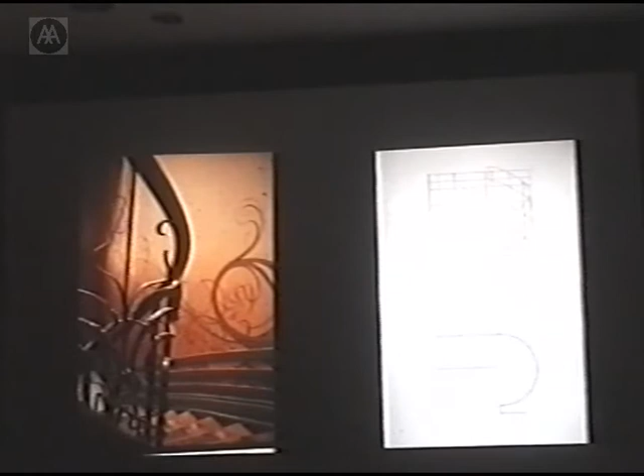The next stair is a little staircase very, very early on in the history of the practice for Tom Phillips and his studio. We did studios for Tom and for Antony Gormley around a shared courtyard. And it coincided with a period of research on the work of Victor Horta for the Masters of Building series.

And I retain an incredible respect for this symbolist and intense world of the interior, and its manipulation of material to an end that is kind of disappeared in some ways. But again, the sense of the use of metal and crafting and the finishes and the stasis of the moment that's captured in the paint.

The light, an amazing grasp of all these - and this is the Hotel Tassel. So this is sort of the first moment of its genesis.

In a way, for Tom, who is an artist working in a completely different way to Antony Gormley, who wanted an expansive space, the passage from an entrance space around this column inhabited by elements powerful or important to him emerges into an interiorized space, because we'd lost the windows to Antony Gormley. Then there's a further climb to this little space, like a portrait painting studio at the top, culled out of very simple materials.

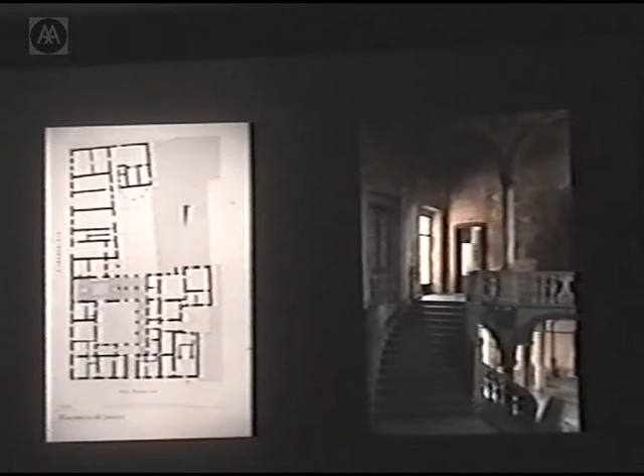It's a town that doesn't give a lot of this away, but there are 100 fantastic small palazzi with passages and stairs running up to saloni—some quite crude and vernacular, some incredibly sophisticated. That was the idea for the mediation of common space in this scheme in Kuala Lumpur.

The idea is that as you rise—this is one of those stairs—off it there's a clubroom which is not enclosed hermetically, it's open to the wind, so there would be a room off it, then a landing. There's a sort of sense of ease in the way a family will use those spaces, totally differently to here, obviously.

It's almost about creating openness, weathering, but allowing the wind to move through—a very environmental thing. It's also about the way these vertical elements create a sense of the semi-public in this community space, shared around the calm of a small garden at the centre.

Stockley Park, on the other hand, is a building, a pavilion, a kind of glass pavilion to be subdivided and let as a sort of seed building—a completely neutral plan, a totally different discipline, dealing only with the public dimension: the entry, the atrium, and the ways into these spaces. But an extraordinary instant landscape. The idea was to create something that was not just about circulation in the interior.

There's more to that, but a very primitive, simple system that required quite a lot of innovation in terms of the carriers and the way it was put together, drawing these trades together, which created a very strong horizontality to the way the landscape is perceived from within the building, but at the same time created a translucent wall that was very high in order to let a maximum of light back into the plan.

At Pembroke, there was the question of taking the brief, which was for 100 rooms or thereabouts, and trying to work between the historic kind of condition of courts and a way in which one might seek to order a wall with so many openings in it.

That comes back to the question of the room, which is very minimal. For instance, the door has a big architrave on the outside but a minimal bead on the inside, in order that the bed can be there or there, that one can change the furniture around.

This is a room like an undergraduate room, where an incredibly important aspect was not having a kind of hotel ensuite conference operation going on—just a small basin and wardrobe, meaning people were sharing the passages. At the same time, to wake up in a room of these tight, standard dimensions, as one does at the Moller Centre at Churchill, to a single window felt inhumane.

So the question of how you put 200 openings into a wall and maintain order was a critical issue. The idea of the back-to-back servicing of these rooms, and therefore a wider order and a tighter order, was something that began to figure on the facade.

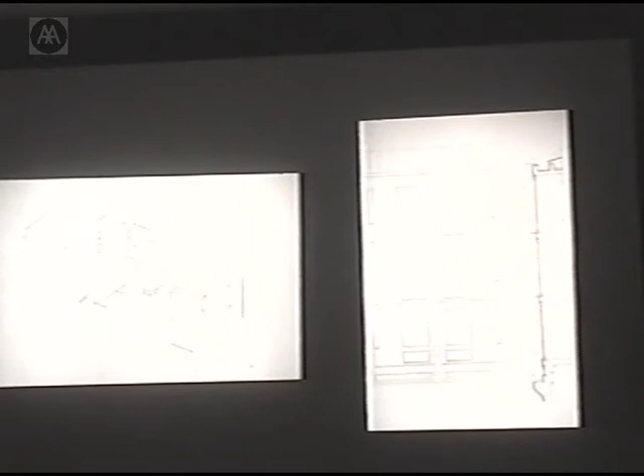Then the condition of a drained area of fenestration within these bays. This is working with a wall of about 550 millimeters, so there's a gutter that collects the water which would otherwise stain the lintel below very badly. It's collected and drawn down the facade and over the bottom sill, relating that to stone and stone size.

This created the tension that culminates with the rhythm of the thicker and the thinner pier of stone. It's a skin of stone, a self-supporting skin. But you have the two windows and the bottom element that gives the maximum of light into the space, so one's able to live in these spaces without artificial light for a good deal of the year.

There are other larger spaces that mediate the monotony of the undergraduate room, culminating in a lodge at one end and a series of garden spaces on the other.

Returning to Damai Suria, which was happening at about the same time as Pembroke, very interestingly in comparative terms—here in Kuala Lumpur, as I say, it's this incredibly moody, savage weather that is torrential or very dry and very hot.

The whole discipline of the facade was about opening it to allow maximum air movement, so we evolved an idea of a large rhythm of frame, and within that a space that again retreats, like Pembroke in a sense. It's a series of layers with the handrail overlooking the communal space, and louvered panels that can be withdrawn and stacked to one side, or pulled and maintained open or shut, but always to create air movement which runs back through a living space to the common areas of the stair hall—so you get the sense of the draft running back.

And so the kind of constraints were clear of a plan which we took very literally. Did not want columns, so these are 15-meter spans with an atrium that you come through to, and bridges, so it can be subdivided and be flexible, etc.

The external line is the load-bearing muscular line of the building, which you can see on the section here, so that transforming the base away from a sort of cour anglaise or area, it becomes the piers. There's a setback there to allow light into the lower level, and then these beams are picked up by these precast encapsulated concrete steel sections.

We don't have time to go into any huge detail, but you can see then that the loading paths sort of set up diagonals, and there were two things that were ordering devices. One was the attempt to create a tripartite breaking of the facade, which is obviously almost twice as long as that in terms of the square, so that there is some rhythm, and that there is a movement down to the entrance at the center.

And these just show a series of preliminary studies. These are actually taken from sketches, but then developed into a more final form in this way, in the kind of black and white.

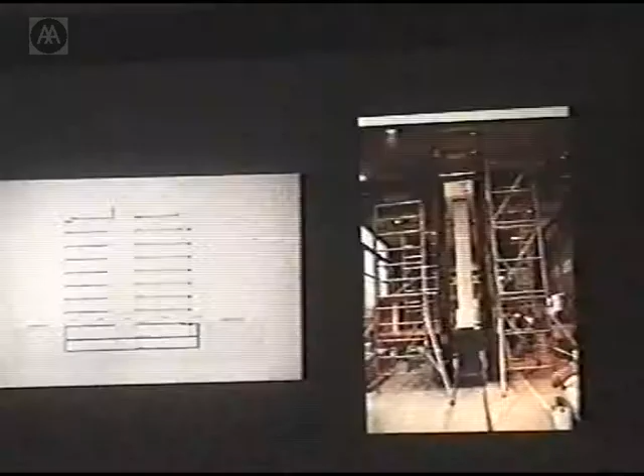But naively, there was a sense in which one might work double heights, but once the accumulative load at this point became impossible, so it became better for the constraint and the simplicity of that ordering, which was a communication with Whitby and Bird. It was a marvellous and interesting period.

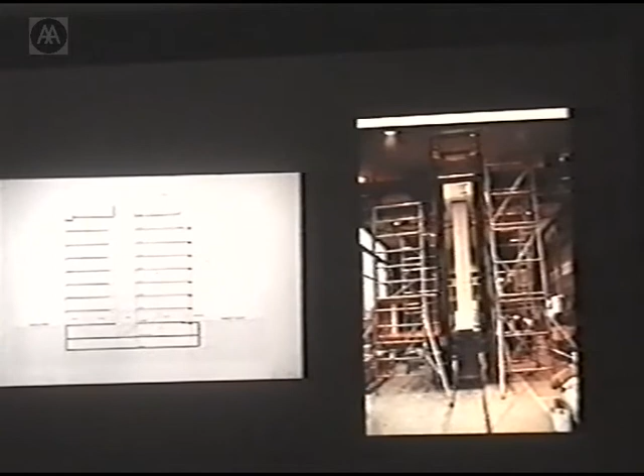And here, you know, this was using Portland stone. This is about the limit of Portland stone that's not used as a wall with openings, but rather a sense of these prefabricated piers. I'll just show you this.

This is because it was difficult to find a precedent for this, we had to build and test these piers. So this is a pier that took 250 tons of load, and actually began to crack the elements at the base rather than show any form.

I mean, it's a fantastic material that's used insanely with the amount of kind of stainless steel and stuff that goes together with the bathroom tiling of standard office facade. So this is the resulting facade, which is now actually built, so it can be seen. It's still wrapped.

But it's that removal, that space—it's a shadow, like a time clock too, because as the sun moves around it's doing an environmental job. The stone acts as a kind of brise soleil and has a capacity of coolth.

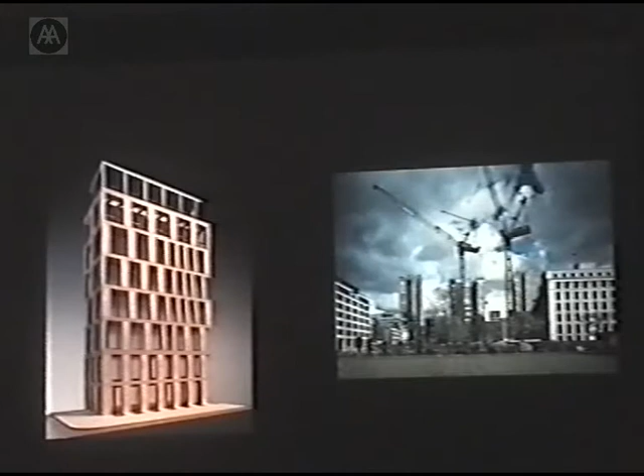Then, very briefly, to talk about the sense of context—because when charged with this, it was a very difficult planning problem, as there was a locally listed building, and the conservation officer had said it would come down over his dead body. He's still alive, but...

It was a question in my mind about the building and the square first, and that actually the building had to work with landscape.

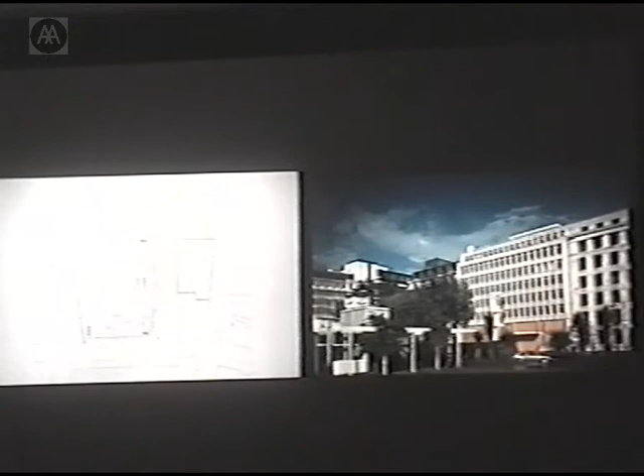So we persuaded the client to take on Peter and Anneliese Latz to look at the square, and I thought it was a very beautiful scheme they came up with—to remove the old bomb shelter that had an ack position on top during the war, and create a sunken public space with an acoustic wall to this very busy street, a glass wall, ramps, and two groves—one a sunny grove, one a watery grove—with pavilions that, following an analysis of passage through the square, create next to this new avenue a place to get a paper. There's a restaurant there now, and we took down elements of this stone wall and rebuilt them as fragments within this garden.

So the genesis of the building was an analysis of how the square had changed in scale and use, and a critique of this building, which had nothing behind it. Actually it's very well built, but the tenant just didn't want to enter through a kind of mausoleum door with an image of a building that had clerks in the attic and a kind of boardroom on the first floor.

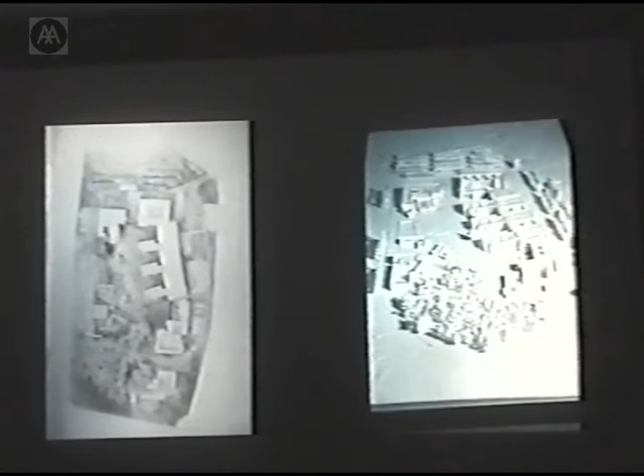At the larger scale, the working of landscape owes a lot to one or two large projects. This was for a hospital where the landscape was seen as restorative at the center of a complex web of hospitals. We did win this competition but didn't get to progress it because it went to PFI. But that sense of working with a big landscape was very important.

That leads on to the idea of context and working with a landscape here around London Bridge, with a sense of the spaces beyond—recapturing the historic nature of some of the passages that had just been removed by highway engineering. We started with the Tourist Information Centre and the steps at the top, and this evolved into a project attempting to create a memory of the old warehouses and wharves that cut into this space before Tooley Street. London Bridge, after all, the threshold to London, has completely disappeared in a white-gloved entry to this corporate building.

This was part of a video sequence analyzing the space before we started working with the design, which has now given on to the tourist information space, public space. It's still the world of commuters, but it has a night life. In the tunnel, the last arch of Rennie's Bridge, this light pavement is like a place of reflection on the importance of this space. There's to be a museum of London Bridge off this, and these are the light lines that mark those wharves.